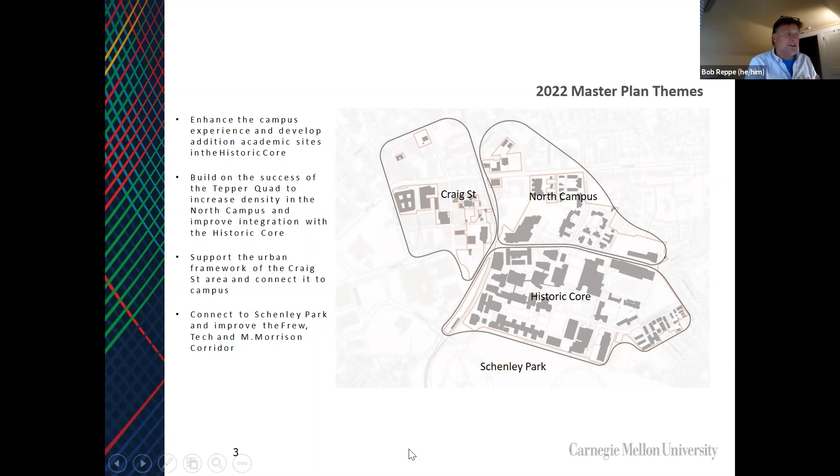We have four basic topics that we want to talk to everybody about today: our development sites that we're identifying in the master plan, and then I'll talk about mobility. Then I'm going to hand over to Jen, and she's going to talk about infrastructure and sustainability, and then community outreach. So we'll just keep moving on these.

For our development sites for this upcoming 2022 institutional master plan, we're looking at 20 potential development sites. Some of these sites have been around for quite some time, maybe 2 or 3 master plans, they just haven't yet been built. Some are new sites, some are sites we think might be built in the next few years, and some are more blue sky ideas. We want to talk about each of these as we look at them in the 3 districts we have here.

In the historic core, we have 2 sides of campus. There's the west of the cut area that we're looking at first, which includes 5 sites, including a potential new or expanded facilities operations that are kind of our roads and grounds facility. That would be down to expand the facility that's already built in the hollow.

That would then give way, hopefully, to a new academic site, which is site number 2, where our current facilities group is housed. This would be a new potential academic building located between Scott Hall and the CIC building, facing into the hollow.

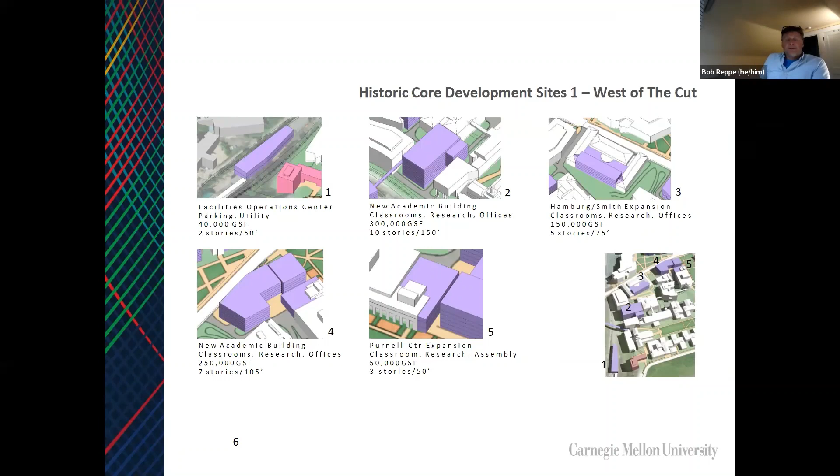If we go to the east area of the cut, next slide please. In this area we have 2 projects: number 6, a small addition onto the West Wing Residence Hall, and the Margaret Morrison Carnegie Hall expansion. Both are continuations from the last master plan, brought forward exactly as outlined in the 2012 institutional master plan.

We have a 3rd project in that area, up near Hammerschlag Hall on top of the hill, another small infill piece. This is actually a typo — it would be 6,000 square feet, not 60,000 square feet, a bit of a difference there. Basically enclosing the open space on the ground floor of Hammerschlag Hall in glass so it could become a new student commons.

The last big area shows 2 options at the bottom, 8A and 8B, which are 2 different scenarios proposed for the existing Donner Hall site. Donner, sometimes called Big Blue, the residence hall built in the 1950s, is moving past its prime potentially. So we're looking at 2 different scenarios: 8A would focus on student housing.

8B would be a scenario focused on moving student housing to other locations, which we'll talk about in a moment, making the Donner Hall site a potential spot for a new academic building. You'll see a couple of these spots where scenarios could either be more focused on student housing or more focused on academic and research.

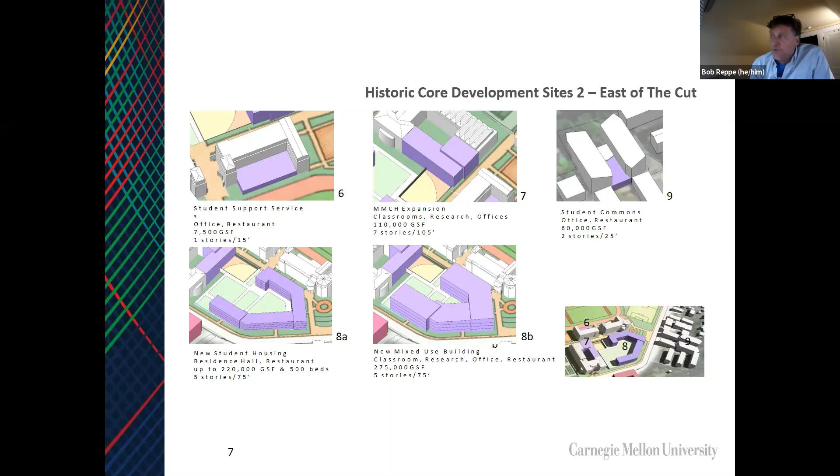As we move to the next slide, it's important to note that for each of these sections in the master plan, we're developing a series of urban design guidelines, as you can see here. These guidelines will guide the development of buildings more architecturally. As you know from experience with master plans, the plan really identifies a box within which you can build. The urban design guidelines give us additional criteria and targets regarding height and massing, setbacks, materials, entrances, etc. These are examples of that.

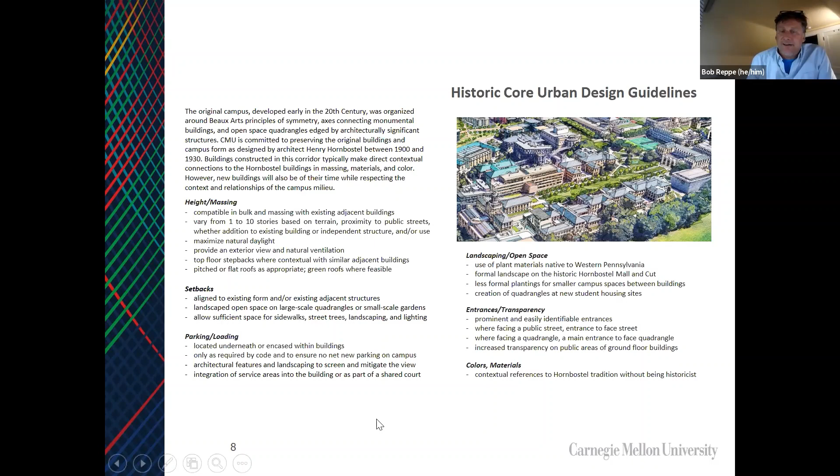Let's move to the North Campus. This is an area we're looking at allowing for additional density, maybe more density than we normally see at Carnegie Mellon, with buildings that could be as high as 8 stories in some places.

We have two sites, 10 and 12, which are continuations from the last master plan. Site 10 is an expansion site for the recently completed Tepper School of Business. Site 12 has been identified as a rethinking of the ground floor at E Tower at Forbes and Morewood, once our health center moves to the new health and wellness building in 2024.

Site 11 is the remainder of the Morewood parking lot, long known as the big surface parking lot. We're carrying forward two scenarios here: 11A, more residential focused, and 11B, more academic building focused. Working with the Donner site mentioned earlier, one of these could go residential and one could not, so we built flexibility into the master plan to allow for either scenario to develop.

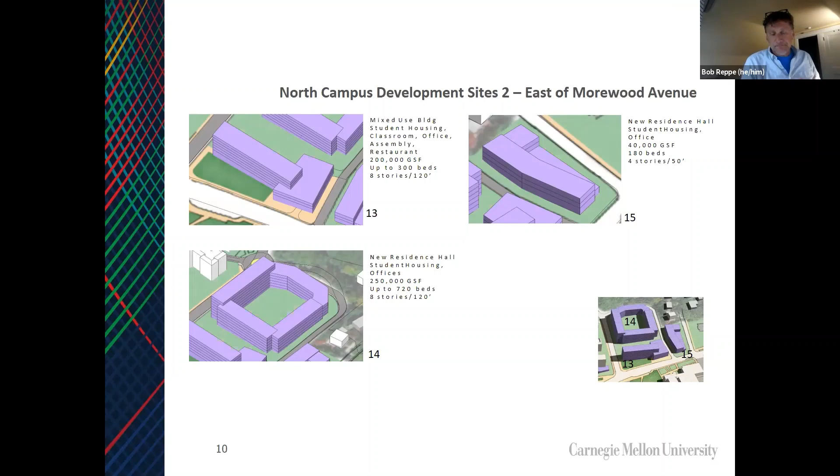If we go to the next slide, please, Kathy. Again we have the urban design guidelines for the North Campus, focusing on those same 6 main areas, though these are a bit different because this district is more in flux and more contemporary in its architecture, which is deliberately allowed.

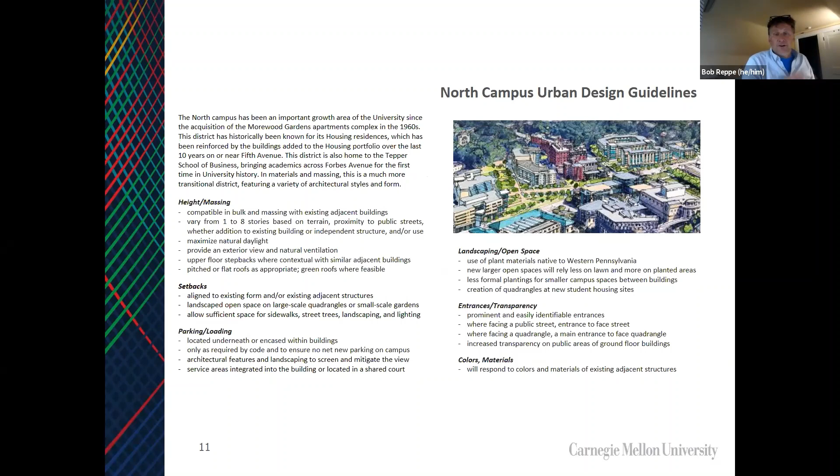If we go to the next slide, we'll shift to the South Craig Street area. Here we have the top 3 projects: the Shirley Apartments on North Dithridge Street, the existing Whitfield Hall on North Craig Street, and a small new entry pavilion project for Mellon Institute. These are seen as neighborhood-type buildings that will be much more mixed use.

The Mellon Institute project is interesting because a vast majority of people entering Mellon Institute from campus currently come in through the loading dock.

The proposal here is not something that would change the historic character of the building, because Mellon Institute is in the Oakland Civic Center Historic District, but would rather potentially look at adding a glass pavilion at that loading area that would make the entry sequence into the building a little better for people coming to campus. The bottom two projects are both the north of Forbes and south of Forbes sites.

These sites are immediately right before you get to the bridge coming from Craig Street, heading east towards campus. Site number 19 is the north of Forbes site, which we see as a sister or companion building to the recently completed TCS Hall, which is currently where the graphic arts building sits. Across the street is a site we've identified potentially for our new Science Futures building, a project that may be coming in the not too distant future, which would be a new anchor building for the university sciences.

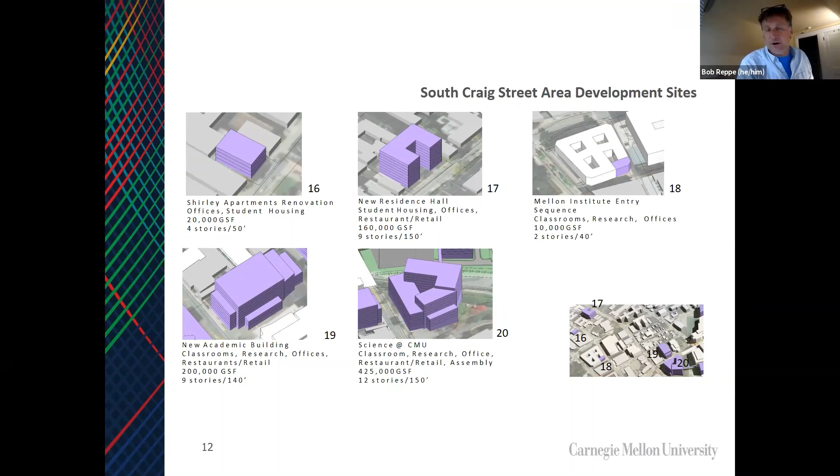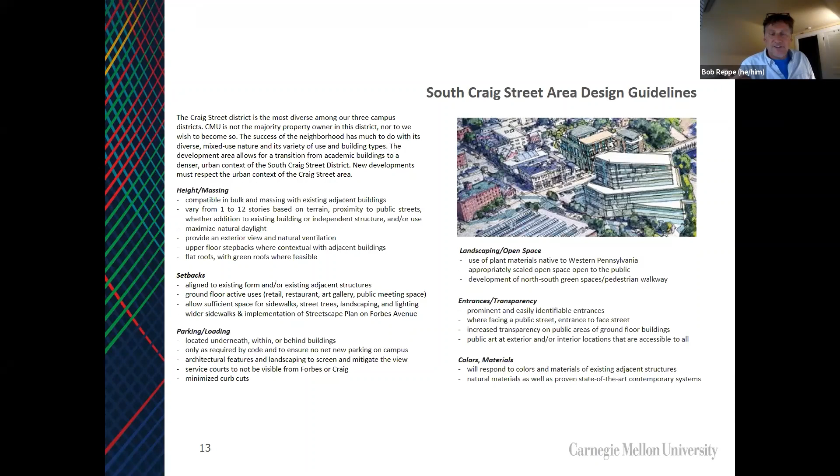So that's a real quick run-through of our discussions on development. Is it best just to go all the way through and then take questions at the end?

Yeah, and just looking at the time, given we have this many presentations on the agenda, just to give you a time check—you've been going about 13 minutes. So I don't know how much more, do you have like three times that left? No, it's more about time. We're probably about 40% of the way through. That was the kind of meat of what we needed to get through.

And we can talk—both Jen and I will kind of glance through the next sets. Okay, and again, understanding that all these slides are available for people, and if they have questions, they can reach out to us.

So let's move on to the next set of slides, which is the mobility slides. I'm going to focus on this one, and then we'll walk through the others very quickly. The mobility goals really define all of the university's ideals and plans for mobility over the duration of this master plan. The statement at the top is key—focusing on people over vehicles, flexibility over status quo. This is demonstrated with the graphic on the right showing pedestrians take priority, over bikes and other wheel-independent personal vehicles, over transit, over single occupancy vehicles at the bottom.

There's a whole host of ways we want to accomplish this, including improving pedestrian pathways and connections, adding bicycle amenities and connecting to the East End bike network, and working with our institutional partners to develop shared shuttle systems. At the end of the day, the big piece of this is working toward a plan that ultimately drives no net new parking on campus from where we are at this point in time.

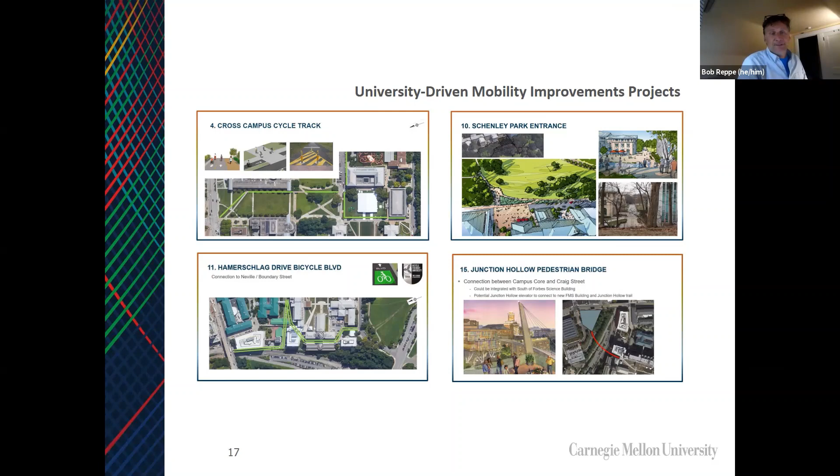Some of these are much more focused on working with our community partners, such as working with the city to correct the misaligned two sides of Morewood Avenue at Fifth Avenue, so you have a straight shot instead of that weird dog leg, and creating a bike connection from Fifth to Forbes along Morewood Avenue. Or rethinking the intersection of Tech Street where it hits Schenley Drive and adding an all-way stop so pedestrians crossing from campus into the park, and vice versa, have a safe crossing place. Also dealing with the Forbes Avenue Railroad Bridge to make the pedestrian area much better there.

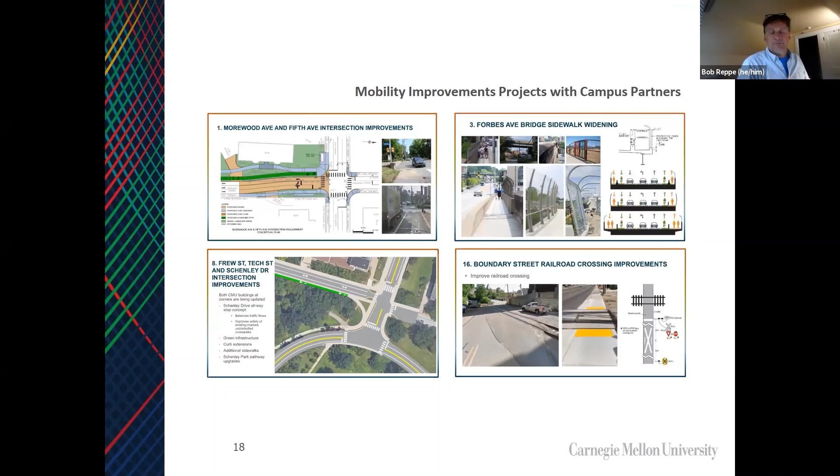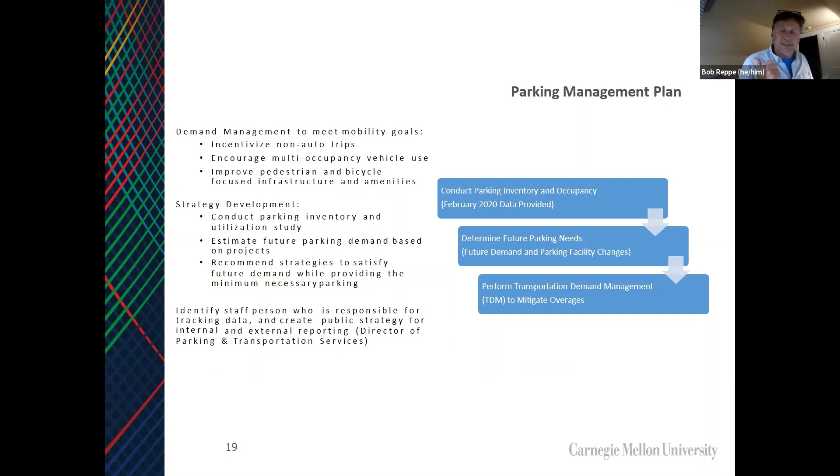If we go to the next slide, this is when we talk about no net new parking. It's a busy slide, so I won't get into it too much right now. The idea is, how do we make a statement like no net new parking when we don't know exactly what the growth patterns are for the future? Part of it is identified here as our strategy, but if we go to the next slide, we can talk about it more, and you can see from the pie charts it's really not so much about

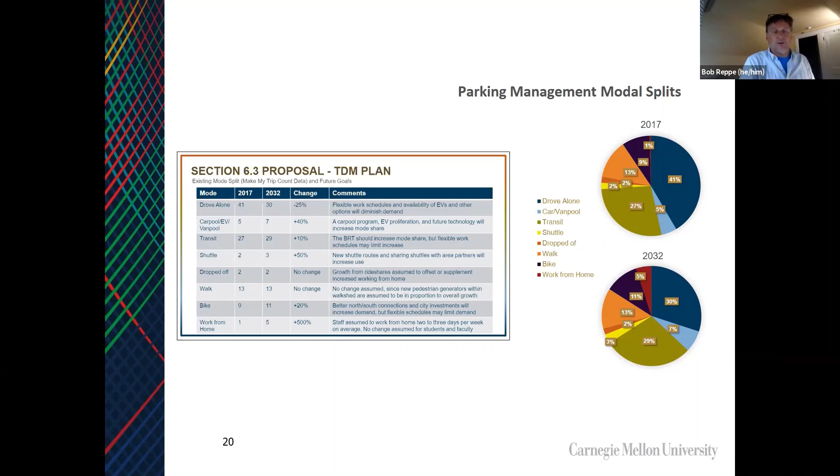Working with the Port Authority on integrating into the new bus rapid transit that's coming is another part of it. Integrating with the bike network being developed in the East End is also part of that.

We have a series of other things we're going to talk about, please feel free to read these on your own. We talk about pedestrian network improvements, moving sidewalks away from the curbs, adding planting strips, adding bump-outs at corners like on Forbes and Margaret Morrison Street to make the pedestrian zone safer.

Next slide, please. We talk about things such as integrating into the East End bike network, creating connections across campus to really knit the evolving bike network of the East End together, and integrating Carnegie Mellon into that to make it a seamless bike experience to get to and through campus.

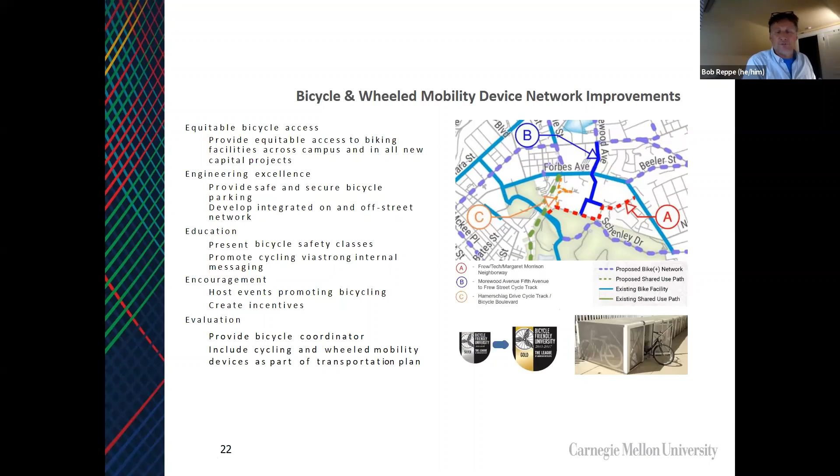The last piece is working with our companion institutions to look at opportunities where we have overlapping shuttles, to get into a shared shuttle system so we can be more efficient with the shuttles and potentially expand where shuttle service goes. And then, of course, continuing free access to the Port Authority for full-time faculty, staff, and students, and working with the Port Authority on the development of what they're calling Project G in their long-range future, which is a connection from the South Hills through Hazelwood, through Oakland, and up through the Hill, and ultimately to the Strip District, and being a part of that development.

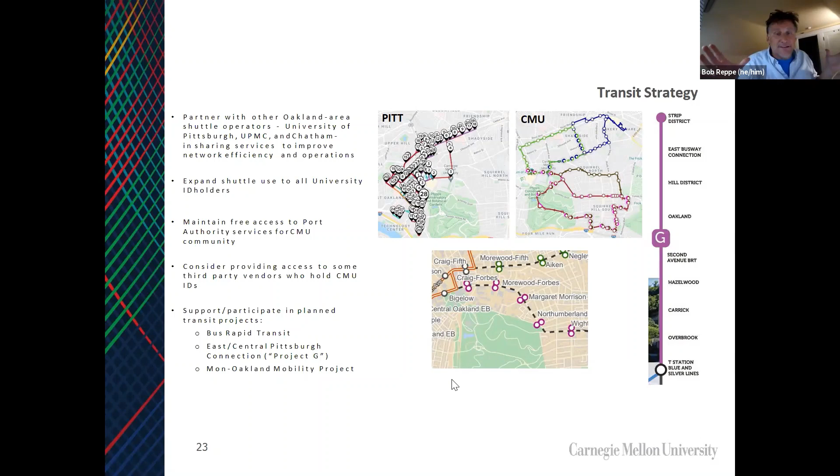That's a lot of mobility stuff that's happened all at once, and I think that was the last slide on that. If you go to the next slide, please.

I'm going to turn it over to Jen, and she's going to quickly go through our discussions on infrastructure and sustainability. Thanks, Bob. Next slide, please.

Carnegie Mellon has a long and proud tradition of sustainable practices and responsible activities towards the environment, and we're going to continue with that over the next, sort of forever, but definitely over the next 10 years as we implement this master plan. These are four overarching goals that we apply to all of our sustainability practices: fulfillment of the United Nations Sustainable Development Goals, there are 17 of them at the bottom of the page.

We're a founding member and committed member of the Pittsburgh 2030 District. We've built LEED buildings since LEED came into existence. One new thing we're going to do is create a platform to help talk about how we're doing as a campus with our sustainability practices, looking at the university as a system when it comes to energy usage, water usage, greenhouse gases, and the like. Next slide, please.

For our environmental protection goals, we think about the physical aspects of the environment, like steep slopes or floodplains. We're going to continue taking care of those, and pay closer attention to things like increasing native plantings and reducing the amount of lawn. We're also looking at a sustainable sites checklist and how to apply those criteria to our development projects, as well as the spaces between buildings that may not be part of any specific development over the next 10 years.

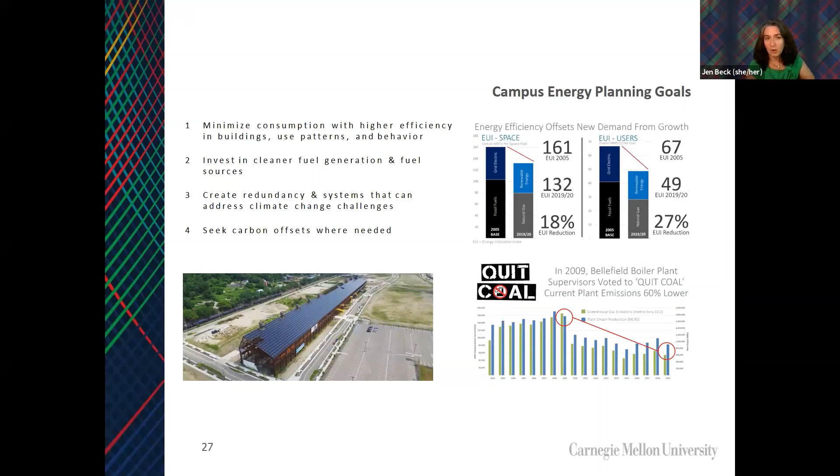Stormwater management is a big deal in Pittsburgh, and it's something we face on our campus. We're going to continue addressing stormwater, not just on properties we're developing, but also stormwater coming onto our properties from adjacent or higher spaces. We have a diverse approach: green roofs, rain gardens, stormwater retention within our buildings, and even stormwater retention outside our buildings, underground, that you can't see. We'll keep looking for unique and new ways to manage stormwater.

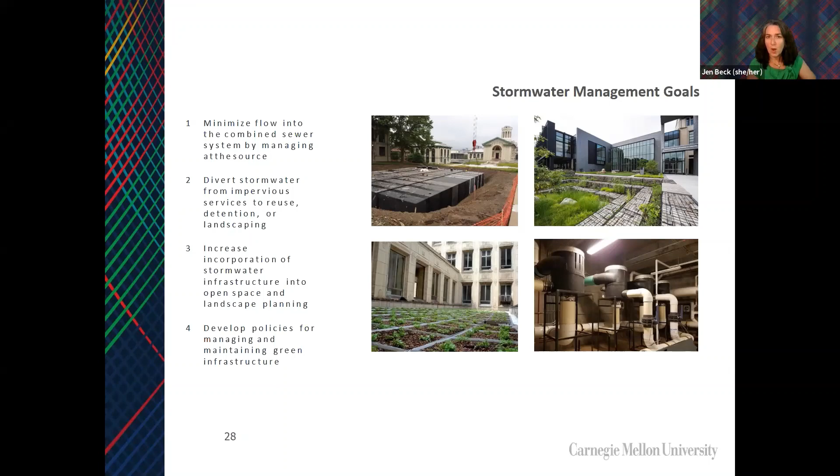As for green buildings, we have 1.5 million square feet of green buildings on campus, and we're pretty proud of that. Essentially everything built in the last 10 years has been LEED certified, which is a requirement for projects $5 million and above. We're going to look at projects that don't rise to that level, and figure out how we can get those LEED certified, as well as how to get LEED certification for our existing buildings.

Waste and water management is another component of sustainability. With waste management, we're doing great with recycling and separating our waste streams, so we can continue doing a better job with composting and having a place on campus to separate those streams. We want to make sure we have enough facilities, inside and outside our buildings, for recycling.

When it comes to water conservation, as a tier 1 research university, we use quite a bit of water in our research processes. And as our campus has grown, there's an increased need for water — more bathrooms, more residence halls. So we want to make sure we're looking at things like gray water and black water usage, and how we strive to become water neutral.

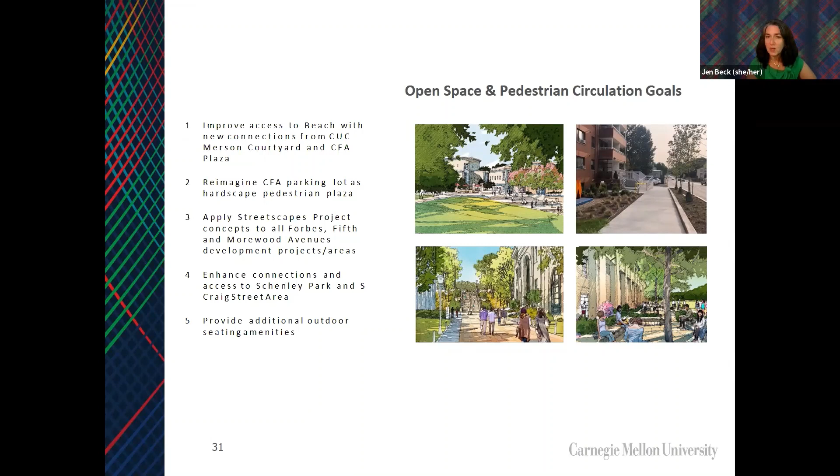Open space and pedestrian circulation is another important component of sustainability. We found out in the last year and a half that despite the persnickety Pittsburgh weather, people do like to sit outside. So how do we provide increased amenities for that, whether it's seating, bike lanes, or a better streetscape, as we've done along the Forbes and Fifth Avenue corridors? Maybe we have fewer parking lots and more pedestrian plazas. We're definitely thinking about the spaces between the buildings as maybe just as important as the buildings themselves.

Okay, so this is the last section. It's about neighborhood enhancement, and there are 5 components to our neighborhood enhancement strategy.

We want to make sure that we're minimizing our impacts on neighbors. We're thinking about the not-so-positive things about living near a college campus. We want to make sure that we're reaching out to the community, making connections, and sharing the good things that are happening on our campus with the community at large.

We want to bring enhancements to South Craig Street. Every great college has a great college street, and ours is South Craig Street. How do we support the vibrancy and diversity of Craig Street for the benefit not just of the street and the neighborhood, but also for the university?

How do we have amenities that are open and available to all? How do we bring people into the university to experience the great things that are happening? And then how do we have a positive economic impact on the region?

So, managing impacts on our neighbors. There are a couple components to this. We want to zone the properties that we own, folding those into our EMI district so they fall under the same criteria, the same regulations as the other properties on our campus.

One new thing we're looking to do in the next 10 years is improve our engagement strategy. Megan Pierce from our office will be an integral part of that, developing a newsletter to communicate to neighbors what's going on campus, not just with development projects but activities too, like when are the fireworks on 4th of July, when is Carnival, what sporting events are coming up. We think we can do a better job of communicating what's going on campus and help manage those impacts.

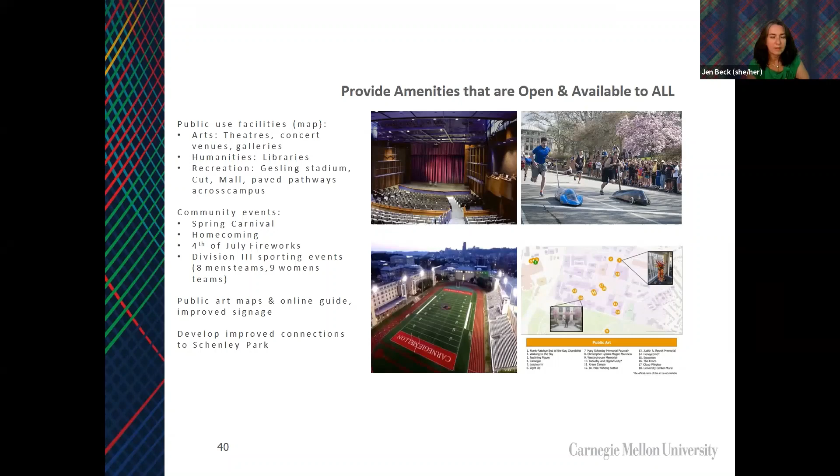And finally, having a positive economic impact on the region. As we've grown, we've created more jobs, hired employees, and we're doing all these construction projects. We have a lot of research going on, and we help sponsor startup businesses. We have an entire website about regional economic impact that you can visit to learn more about the diversity of ways in which Carnegie Mellon has a positive economic impact on the region.

Okay, so we've been having a lot of meetings since January. We're closing in on the 3-digit number, I think, as far as the number of meetings we've had on our campus with community groups, with RCOs like this one, to talk about the ideas we have for the university through 2032.

So we have some upcoming community meetings. This is the first one. You'll probably see an invitation in the next couple of days for one of our community town halls. There are three of them, so you can attend based on your schedule, although it'll be pretty much this presentation.

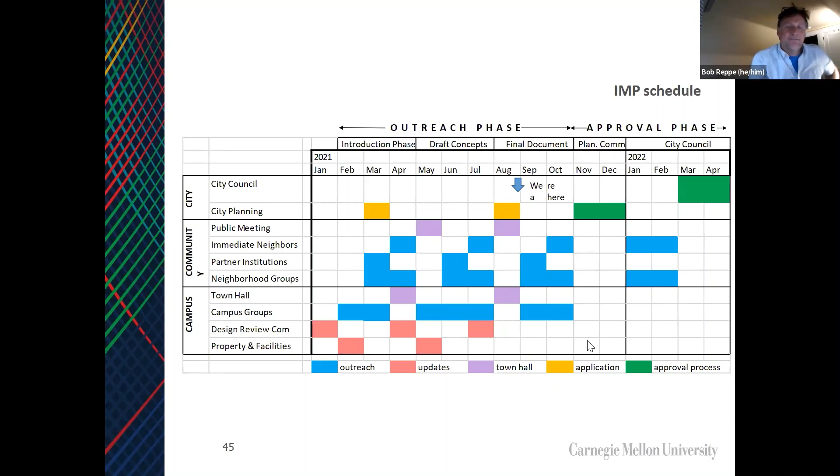I'm checking Facebook just in between our presentations. We did have a question I don't think I verbalized at the beginning about what is being done about partying off campus in Oakland, and that's certainly been an issue for us in the last week. I would encourage Oakland residents concerned about this issue to come to our Let's Talk and Oak Watch meeting coming up in September, and to call your city council representative with concerns in between time, and for immediate concerns you can call 911. And if it's a longer term issue that isn't immediate, you can use the city's 311 complaint line. I would encourage residents to use both of those as appropriate.

You can also email your information to Oak Watch at oakwatch@opdc.org, and we'll be gathering testimonials and information about exact issues we might want to make sure our university partners send somebody to address. If there's a particular address that was problematic, let us know and we'll make sure that gets reported as well. So I just wanted to respond to that, but definitely get involved with Oak Watch and follow that more closely. It is something we are working on - it's a very, very serious concern right now.

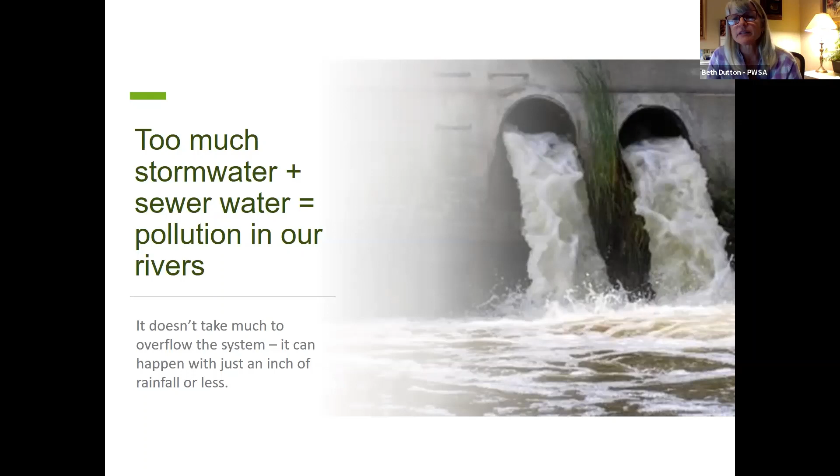Stormwater often combines with sanitary sewer water, which is what we flush from our toilets and goes down the drain, and it combines in our sewers. If the sewer system gets overwhelmed, instead of sending the sewage to the treatment plant to be treated, the system dumps it into the rivers and waterways, or it can back up into people's basements. Billions of gallons of sewage overflow each year into our rivers and waterways, and it doesn't take much to overflow the system — it can happen with just an inch of rainfall or less.

As noted earlier, our system was not built for this volume of stormwater. We have more pavement and hard surfaces than we did 100 years ago, and more rain and localized severe storms that the system needs to handle. Approximately 1/4 of PWSA's 1,200 miles of sewers still in use today were in the ground by 1908. So we're dealing with a very aged system.

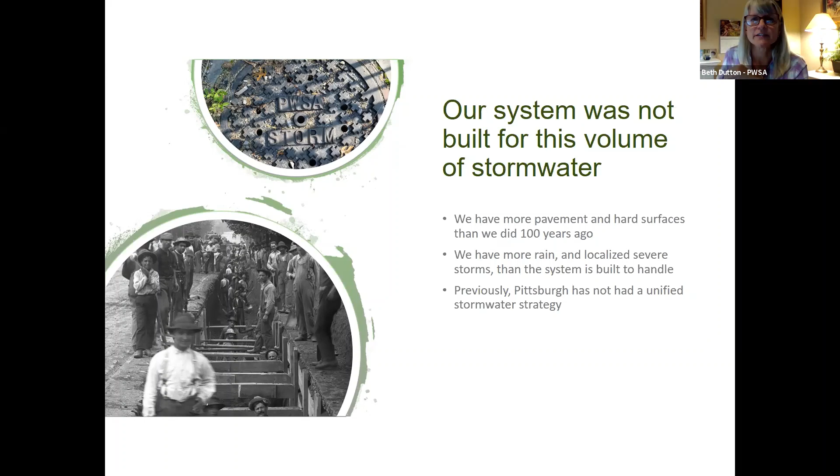To tackle our stormwater challenges, PWSA is going to build an innovative stormwater management system that keeps as much stormwater as possible out of our sewers during storms, so that when it rains, we don't have basements backing up with raw sewage.

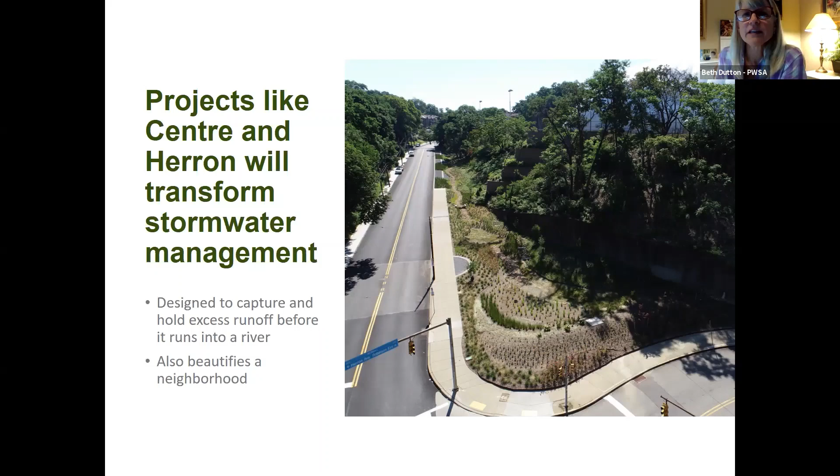So as you can see here, this is one of PWSA's green infrastructure projects. This is Centre and Herron, and this is going to transform stormwater management in the city with projects like this. This project was installed several years ago, and it manages about 1 million gallons of stormwater per year. It captures and holds back the runoff before it causes a sewer overflow into the river. In addition, it's a nice amenity for the neighborhood and helps beautify it.

As I stated, PWSA is building a system that keeps as much stormwater as possible out of our sewers when it rains. One of the ways we're doing this is by building green infrastructure such as Centre and Herron, which will absorb, slow down, and help hold back sewer overflows and the flow of water.

Green infrastructure uses solutions that mimic nature. When we combine it with traditional stormwater solutions like underground storage, catch basins, and culverts, we can use this holistic approach to address our region's stormwater problems in the most affordable and effective way possible.

To date, PWSA has constructed about 13 green infrastructure projects throughout Pittsburgh. Sawmill Run and Wightman Park were completed last year, and construction has recently started on the second phase of the Wightman Park project in Squirrel Hill. We're also starting construction on projects in Shadyside, 4 Mile Run, and North Point Breeze. In addition, several more projects are currently in design.

With the concerns about building green infrastructure, better managing stormwater, and reducing sewer overflows, we'll need an additional revenue source to help make this all happen. A stormwater fee, if approved, will help fund these projects and other stormwater initiatives. This is a smart investment that will help improve our management of stormwater and reduce flooding issues. Prevention of these kinds of problems is a more cost-effective way of dealing with them, before it becomes a crisis.

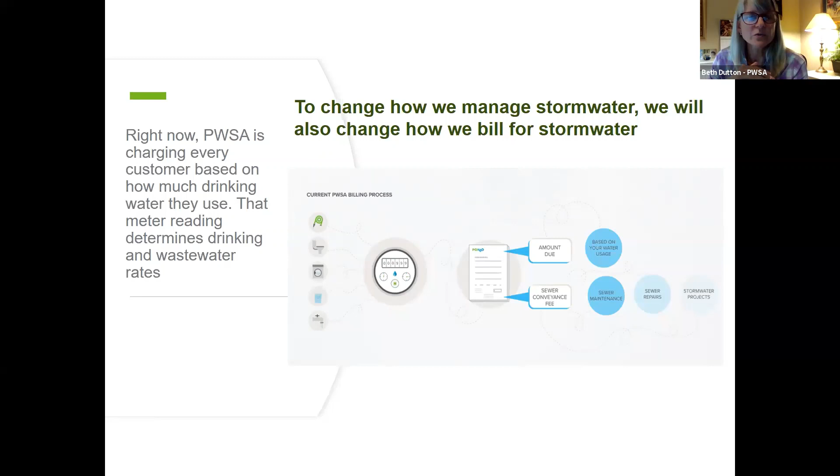To change how we manage stormwater, we're also going to change how we bill for it. Currently, PWSA charges every customer based on how much drinking water they use. That meter reading determines both the drinking water and wastewater rates. But this is not an equitable way to charge for stormwater because it considers the amount of water used rather than the amount of stormwater generated by a property.

Starting in 2022, stormwater will be billed differently, pending PUC approval. Every parcel in Pittsburgh has been mapped, and even if a parcel has no water meter, it will be eligible to pay a stormwater bill to PWSA, provided that it has greater than 400 square feet of impervious area. As noted, this will be a more fair and equitable way of billing than meter usage.

So the fee is a smart investment, and if we don't improve our stormwater management system, these flooding issues we've been experiencing will only get worse. Every property owner will pay an amount proportional to the amount of impervious surface on their property. I'll go into this in the next slide.

The stormwater fee is based on the amount of impervious surface on a property, as I noted previously. Impervious surface is the hard surface on a property, such as roofs, sidewalks, and parking areas that don't absorb stormwater. These hard surfaces generate stormwater runoff that collects trash and sends polluted water into our local waterways. This water can also overwhelm our sewer system and cause streets to flood, basements to back up, and sewage to overflow into the local rivers and streams.

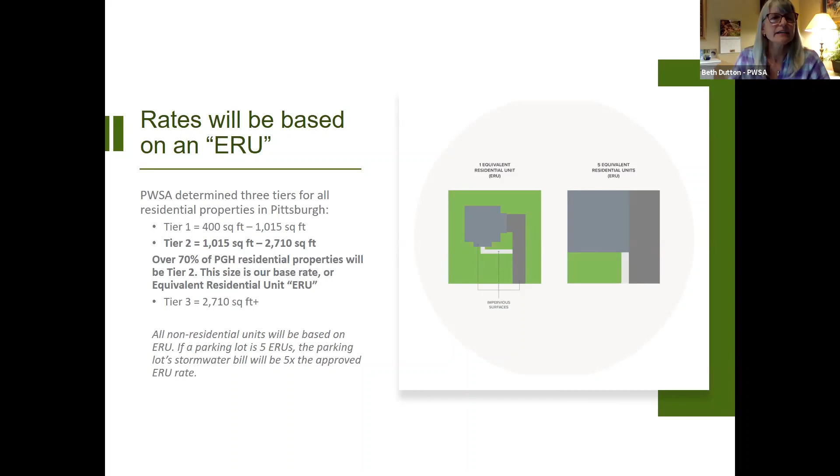So we took to heart the need for equity in the fee. And as I noted before, because the properties are different sizes, we have these 3 tiers, broken down in different monthly rates.

For our first year, 2022, when the stormwater fee will be implemented, for the 1 ERU, that's tier 2, the monthly rate will be $5.96 for residential properties. And in 2023, that rate will be $7.95.

Rates for non-residential customers, such as hospitals, the city, universities, and commercial properties will also use this ERU model to determine their rates. For this purpose, 1 ERU is equivalent to 1,650 square feet. So for example, if a parking lot is the size of 10 ERUs, the parking lot's monthly stormwater bill will be $59.60, provided that the rates we proposed are approved by the PUC.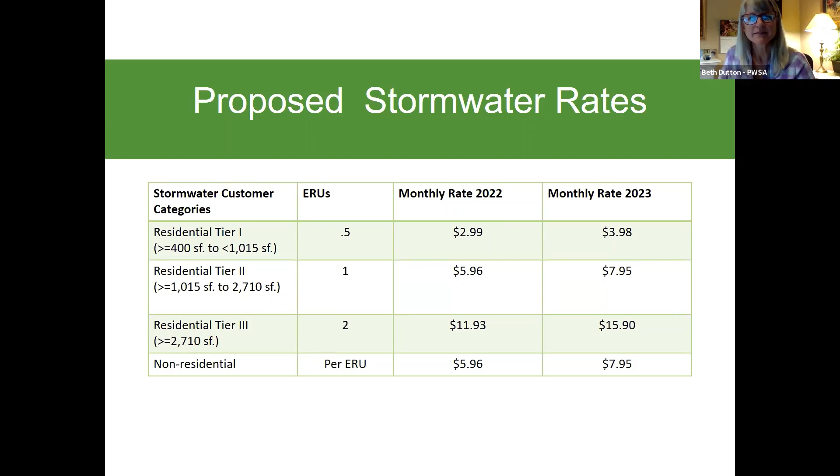Next slide please. So the payoff for better managing stormwater through additional revenues will be fewer basement backups, less pollution, and a healthier, better Pittsburgh. By changing how PWSA charges for stormwater, we can over time improve how we manage stormwater and provide multiple benefits. We didn't get into this situation overnight, so it will take time to address these in a systematic way, and I'll talk about that in a minute.

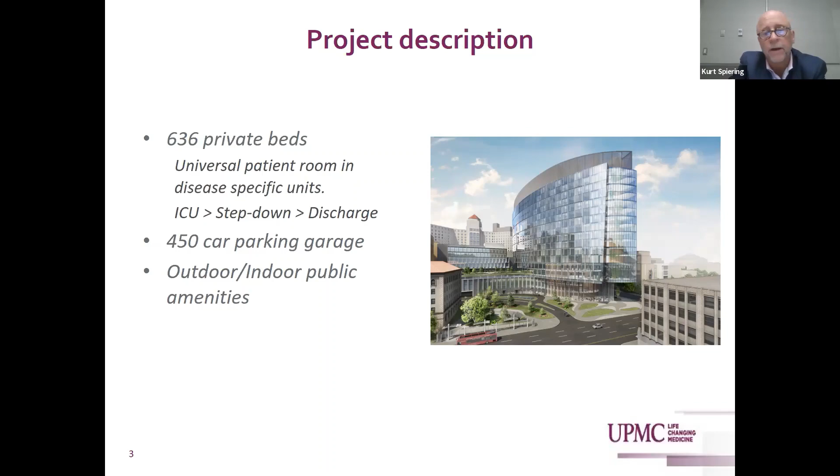It also includes a 450-car parking garage, which is part of the overall building but not self-evident from the street, used to help serve the majority of the demand for the inpatient units included in the tower. We also have outdoor parks or green spaces and amenities that Bryan will go through in a minute, to help create buffers between the community and the building itself.

From a wayfinding perspective, we have three different portals of entry. If you look up at the top on O'Hara Street, there's entrance A, which is really an entrance used by the community, accessing Terrace Street. But our primary entry portals are down 5th, which has the inpatient entrance off of Atwood Street, what we're calling the ambulatory or outpatient entry, and the emergency department entrance along Lothrop, and then an intended post-acute and outpatient entry along Darragh Street. Again, all of them access off 5th Avenue and off Forbes primarily, and those create the circulation paths across the campus.

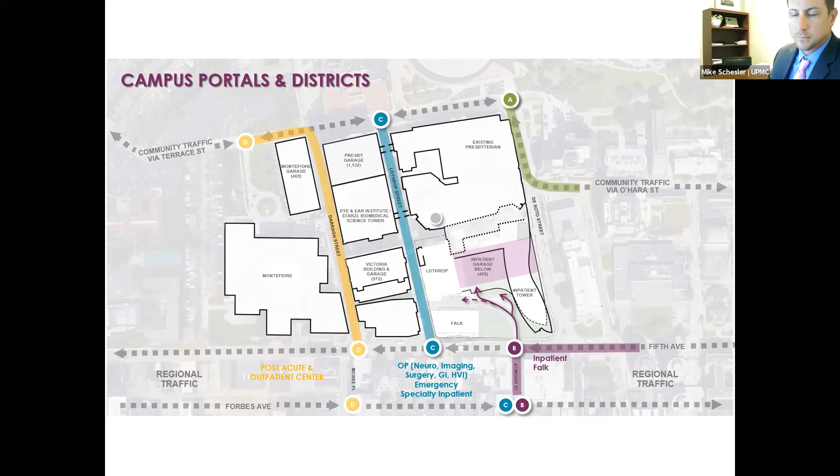Thank you. It feels like we've been in design for a long time, but really it's been master plan refinement, so only recently did we get started into the meat of design. We've just started our design meetings with internal users, and we're going through a series of community engagement meetings, which this one is. We're hoping to do those throughout the balance of the summer and fall, which would get us to zoning in March of next year.

And then as certain design packages continue to progress, we'd have earlier ones that would allow us to begin construction as early as next summer. We're anticipating four years of construction, and then in order to activate the building, that would take us to about

the fall of '26. Similar to the gentleman from CMU, we would like to come back for an official development activities meeting in October. Hopefully this can serve as a good introduction to the project, and then we can be more thorough in a future meeting and respond to any questions we aren't able to answer today.

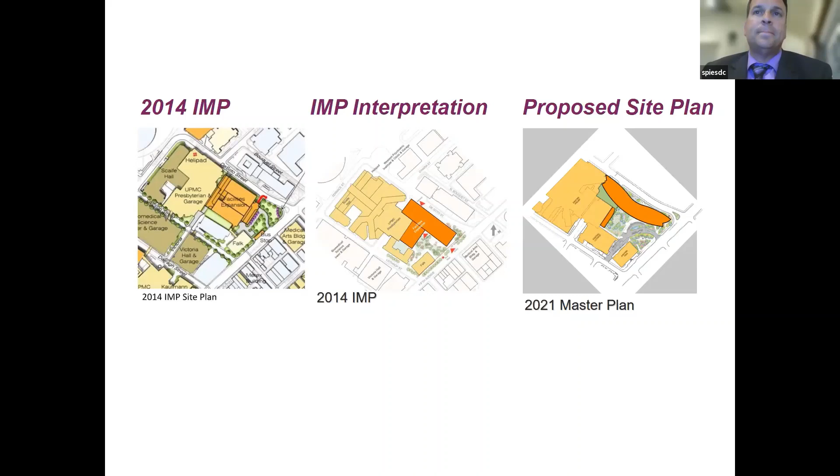And that also allows us to open up opportunities for green space and more of a public realm, as Bryan mentioned. Next.

Hello, I'm Bryan Cannon. We'll try to go quickly. I'm going to set the stage for the context. This new tower is taking its place in a really interesting collection of dramatic and iconic towers in the immediate vicinity. The following slide, next.

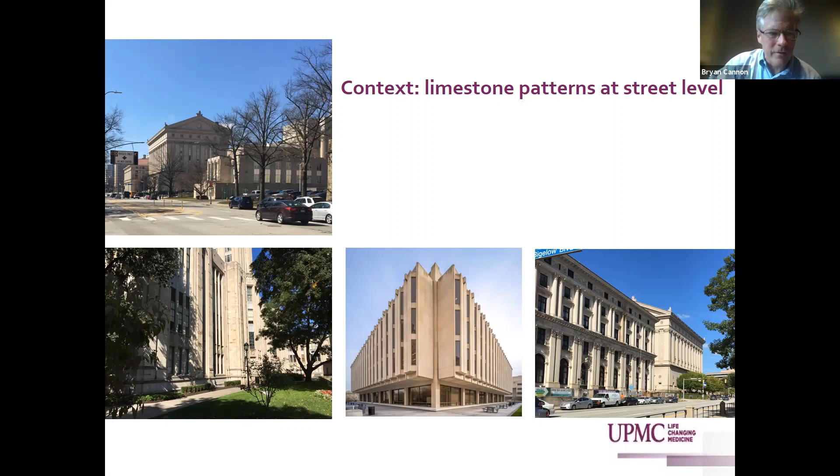In addition, there's a really beautiful pattern of limestone architecture at the street level, a lot of vertical emphasis, really beautiful detailing, and we're picking up on that quite literally in the design of this building so that it feels like it's contributing to the primary character of Fifth Avenue.

The next slide looks at one of the key attributes that we've tried quite hard to take advantage of, which is a sense of quite serious urban buildings set in a really beautiful park-like landscape.

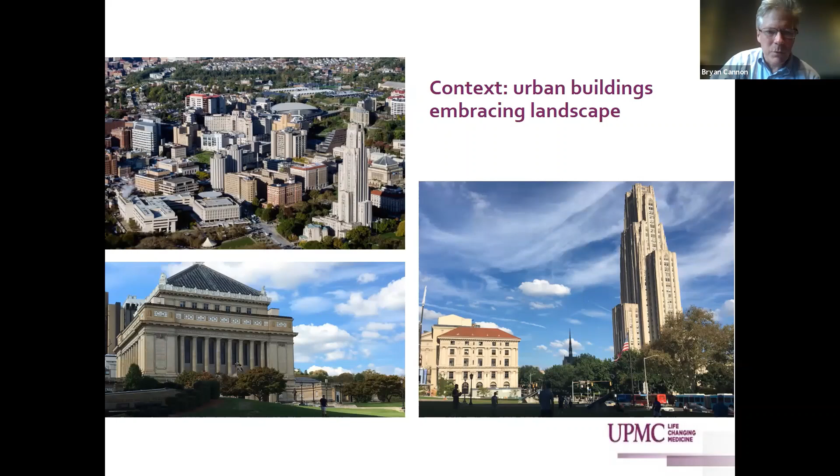The next slide tells a bit of a story of how we've been able to excavate some of the old history of the site. The image on the far left shows a concept for the Presbyterian Hospital with its original great embracing arms, defining the end of a large entry forecourt. The middle images show some of the feeling of how earlier in the century, Old Presby sat on the hill in a kind of park-like hilly landscape. And the image on the right shows what we're attempting to accomplish by carving out the center of the site,

creating tiered gardens, one right down at Fifth Avenue and one up above the raised parking level, which reintroduces a significant amount of green space and also creates wonderful amenities both for the community and for the patient population living and working in the hospital.

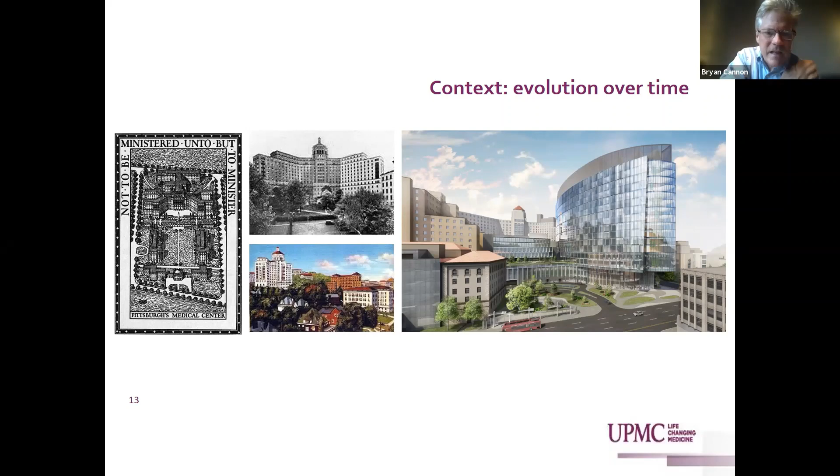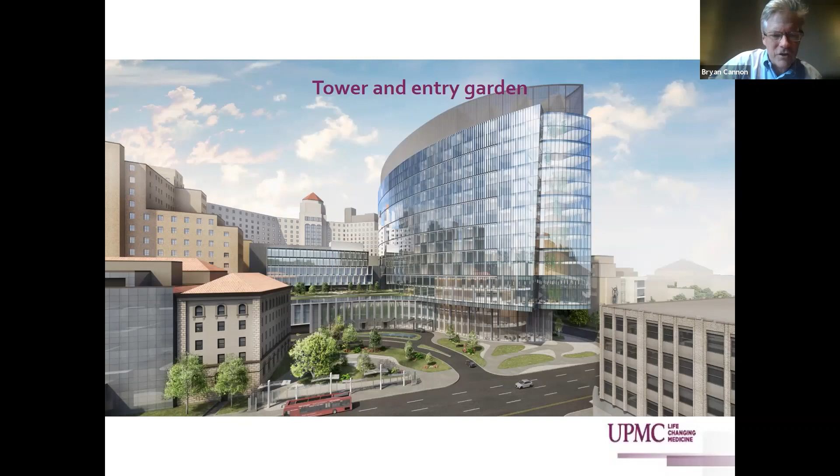Next slide looks from the opposite direction. We've seen a version of this. Here we're looking north back to the old Presby Tower and our entry garden at the ground level and elevated garden above the garage. The next slide gives you a sense, under 300 feet tall, just about 590 feet north to south.

The base of the building, 39 feet tall, aligns with the existing entrance to Presbyterian Hospital up the hill. So conceptually, this project is one kind of base experience that is more immediately related to the public realm and accessible to the city. Above that sits the more private world of the patient care bed tower and its associated amenities.

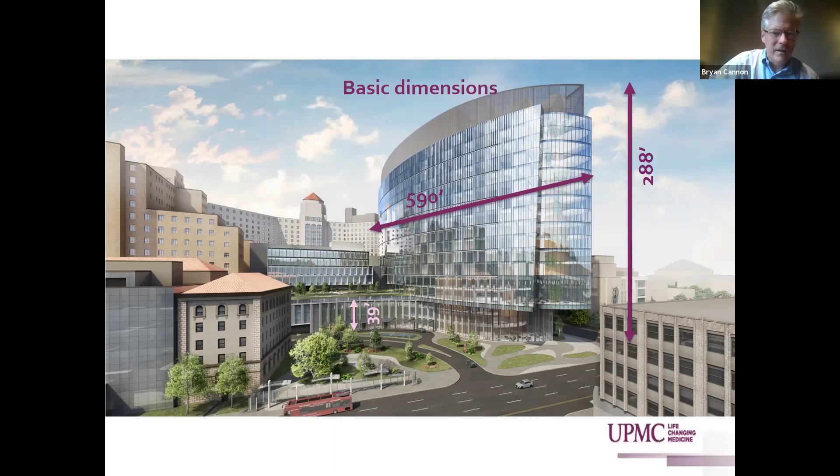The next slide looks at the view on Fifth Avenue looking east. The bulk of the building is inserted longwise into the depth of the UPMC property, so it's a big building. But we believe it's nicely surrounded by serious context buildings, so the scale is not actually overwhelming. It's comfortably bracketed by surrounding buildings as well.

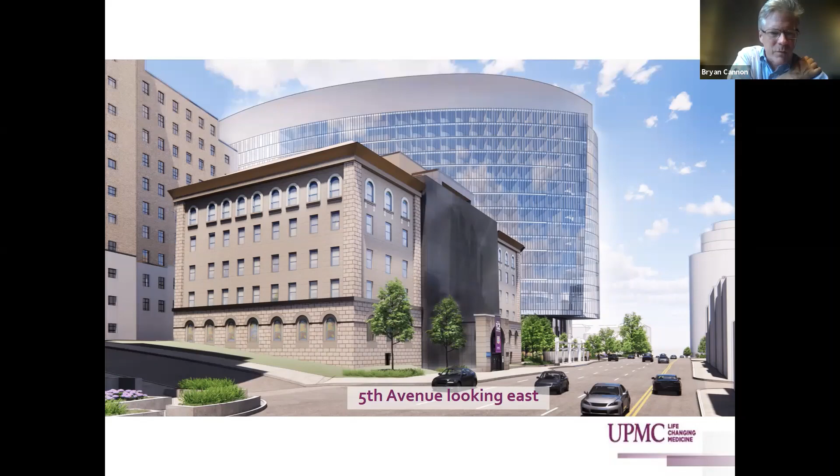The next slide looks at our entry garden. We have a cantilever right at the corner of Fifth Avenue and DeSoto Street. This opens up the corner of the property so that views around the corner and into the park space we've been describing are considerably more generous and not constrained.

If you look at the next slide, looking north and west right at that DeSoto intersection, you can see how the cantilever significantly opens up the public space. So as you're traveling on Fifth Avenue, the garden space that is part of the project is open and accessible to the public, and we've created a more generous public plaza space right at the corner of what is a very active and busy urban pedestrian scene.

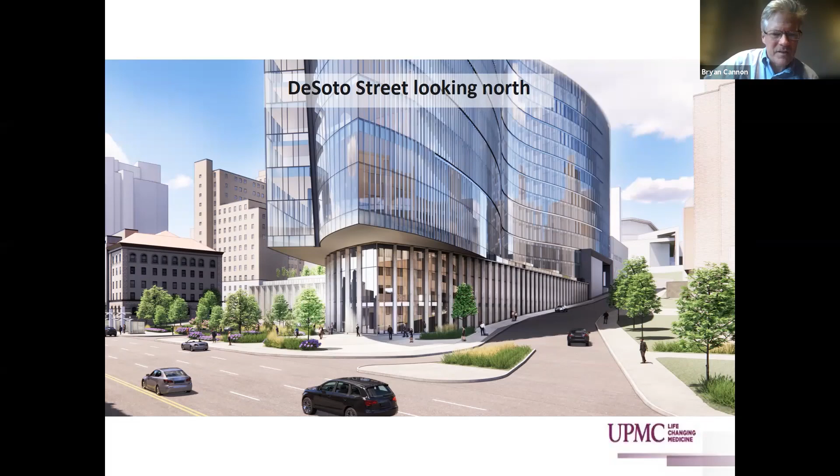Keep going, one more. This is a look at the building in the evening hours, which helps give you a sense of how the interior of the base 3 floors of the building relates to the street.

These are the spaces that we describe as the lifestyle village. They're support functions, dining, places where families and staff can get a little direct connection to the city, respite from the demanding experiences of caring for their patients on the upper floors, but also giving the community a strong connection to the facility inside, including what we hope are a significant number of retail and commercial opportunities that will be directly relevant to life in Oakland.

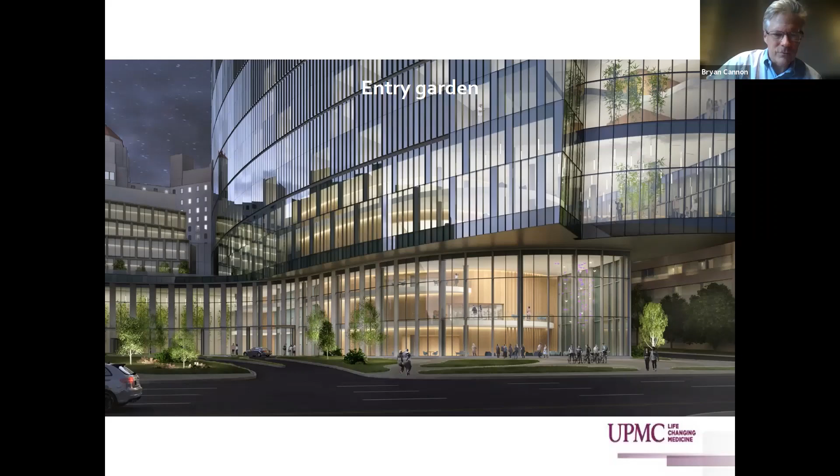The next slide looks at how the gently sinuous base that curves around the front of the building accomplishes a 3-story connective lobby, which disguises the 3 stories of parking above grade. So from the street, you have no sense of a significant parking structure on this property, and we'll be putting landscape and manageable ornamental trees of modest scale up on the top of that.

This section doesn't show it, but there are also 3 levels of parking below grade, which support the valet parking operations. Next slide looks at halfway up the hill, if you head up DeSoto Street to the existing primary entrance of Presbyterian Hospital, which we now call the north entrance. It serves the outpatient population coming to Presby and to a lesser degree to our new tower.

It lightens the traffic burden at the main entrance down on Fifth Avenue and gives a really direct connection for patients heading to outpatient procedures. As you can see, it has a nice open aperture onto the raised garden above the parking structure, so as you travel through this space, you get a really beautiful glimpse of the landscape beyond it.

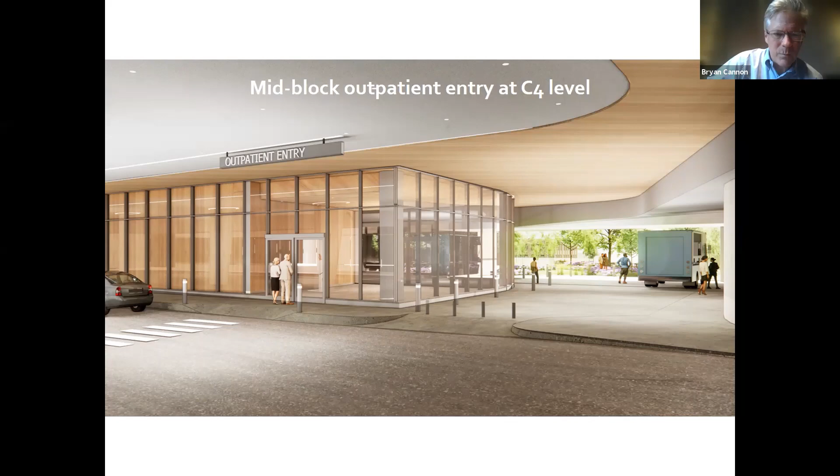The next slide looks at how that space, this elevated garden above the parking structure, might be developed with the possibility of both use by the hospital population, but also controlled public access for special events, which will make it a pretty great neighborhood amenity in Oakland. Immediately adjacent to this level is the major Presbyterian Hospital cafeteria, which affords people a really wonderful opportunity to get lunch and go out into this garden space during breaks.

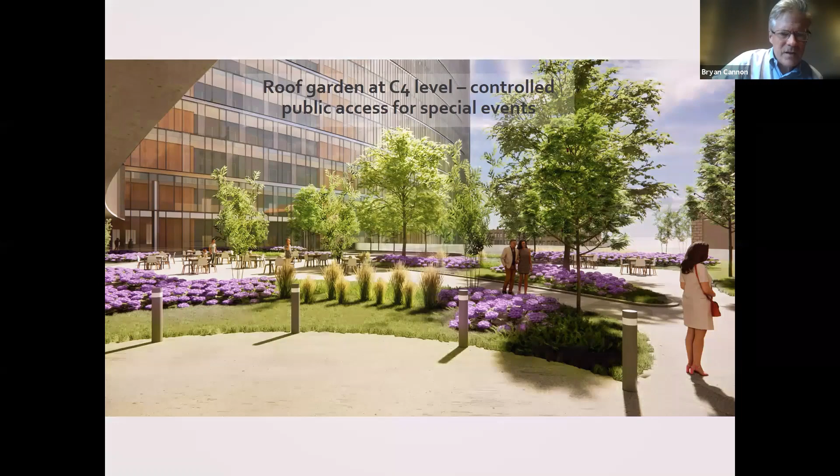Let's keep going, and I think we'll describe the flows in greater detail. Just briefly, I mentioned those flows and the different inpatient, outpatient, and the third entry, which is post-acute and outpatient entry as well.

There are points of entrance for parking. The Victoria building garage becomes accessible parking in addition to the underground parking for the outpatient entrance and outpatient services, for easy access. The Montefiore garage will be used for Montefiore Hospital as it is now, and primarily staff will be parking in the Presby garage, because the public entries will matriculate down to the south and use the underground parking associated with the building and Victoria garages themselves.

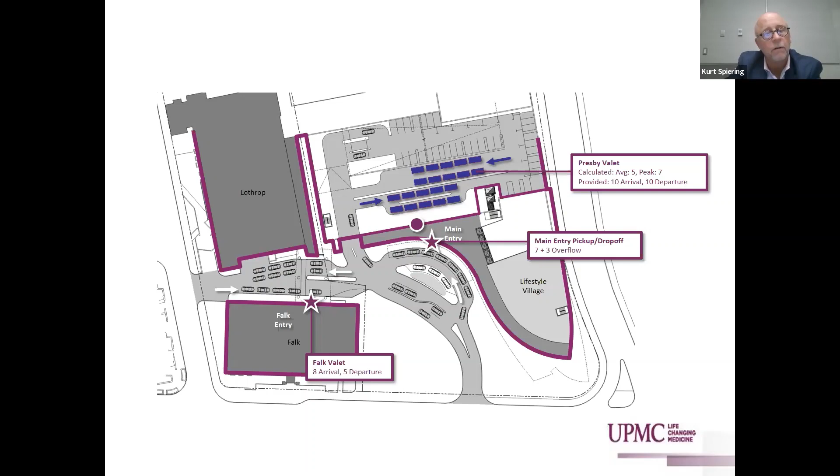Parking for Falk is as it is now, off the same entrance, and parking under the canopy and driving through to a valet drop-off and pickup sequence as it currently exists.

Next slide. Bryan, you want to describe some of the landscape? Sure—this illustrative landscape plan looks at all levels of the landscape in the same view.

Down at the corner of Fifth and DeSoto, we have a more urban public plaza, which might be useful for public events, small concerts, possibly a farmers market space. Behind the existing bus rapid transit shelter, there's an entry garden which will have additional waiting space. It's a buffer zone that creates a great experience on Fifth Avenue and also protects Fifth Avenue from the sense of traffic arrival into the hospital.

We'll have a water feature that separates the passing travel zones from the drop-off, and vehicles will enter the parking structure underneath this elevated terrace at the upper level, which relates both to the food service inside and to the north outpatient entry we described earlier.

This diagram doesn't quite show it, but the aperture that allows service and occasional public access into that space is in the northwest corner of that garden space.

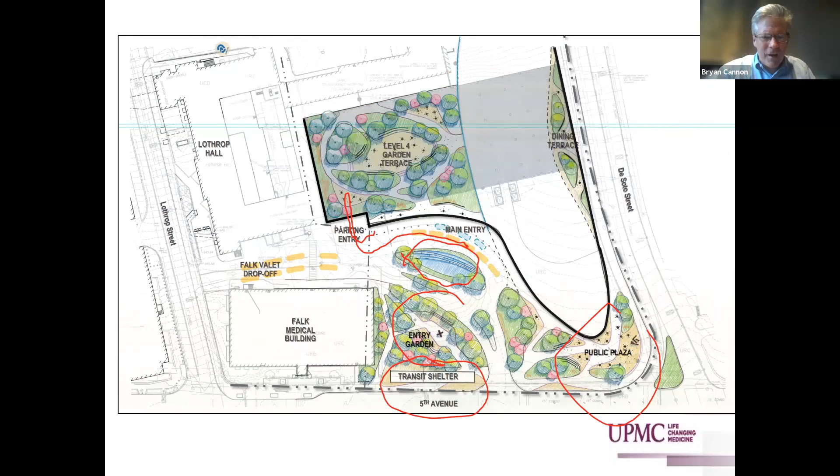So this is going to manage all of the on-site stormwater management requirements of the site quite beautifully. It does a wonderful job of creating useful recreation and respite spaces for the users and the community, and it also offers us enough acreage that we can provide some really wonderful public amenities as they evolve.

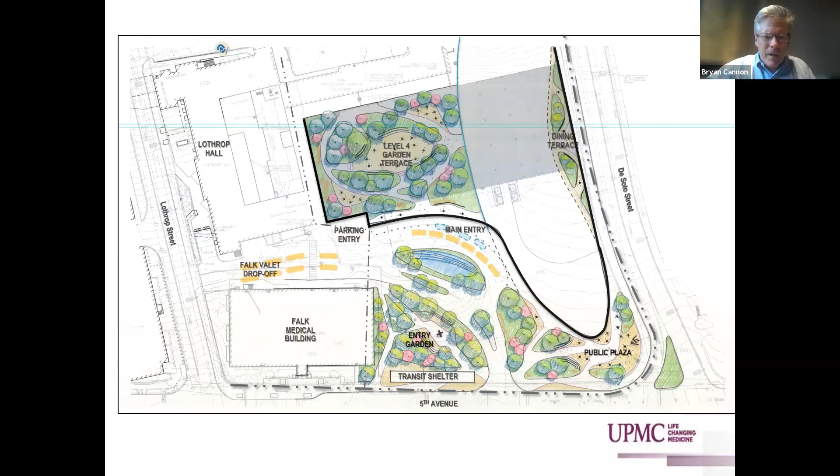We'll go now—Bryan, there's a question in chat we can answer as we go through some of the renderings again. The question was: describe how an all-glass building relates to the surrounding community context and some of the stone. I think you described it briefly, but as we go through it again, please make sure you touch on that as part of the architectural response.

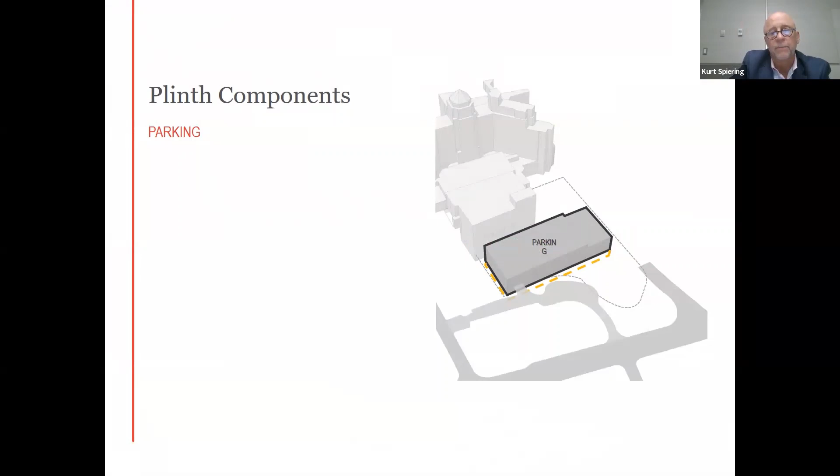When we look at the functional components, we talked about the parking deck, the 450 cars that is both below grade and somewhat above grade, underneath the landscape terrace, with the clip-on frontispiece for the lobby and waiting. Next slide.

This shows the lobby in front and the lifestyle village that Bryan mentioned with the public amenities. The idea is that this bottom space is really supposed to welcome the community. We don't want to create a fortress on this site that wouldn't be welcoming for the public, but at the same time, as we move up in the building, we need to create that sense of privacy you might want for your own healthcare experience.

But we want to make this lower level area immediately accessible and welcoming to the community, because that's where they'll be accessing it on the greatest level, which is at the street level where all the activity is.

The next slide is the sky lobby. Because most of Presbyterian is up this large hill, we're actually up about 4 stories from the 5th Avenue site to the actual roadway that passes through one block away, under the ED and current main entrance. We're using that as the sky lobby.

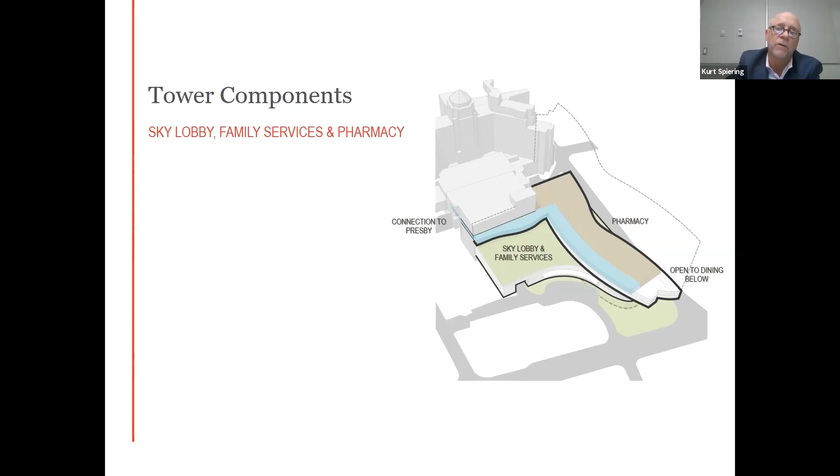So one level above the ED and old main entrance is that sky lobby, which connects both buildings in a very public way. That also walks past and views over the terraces and the green space we have down below on grade. And then the inpatient floors above will be repetitive inpatient floors designed for specialty units but have a commonality.

And I would just make one comment. Even though the building appears to be very sinuous and in some ways very design oriented, it's a very rational floor plan. It has space where we need it for supplies and storage within the units, and it removes that space from the center of the building, where we have public access and elevator cores and don't need as much support space. So I want to make it very clear that this is a very rational, very logical floor plan that evolves into something that is quite elegant and quite simple.

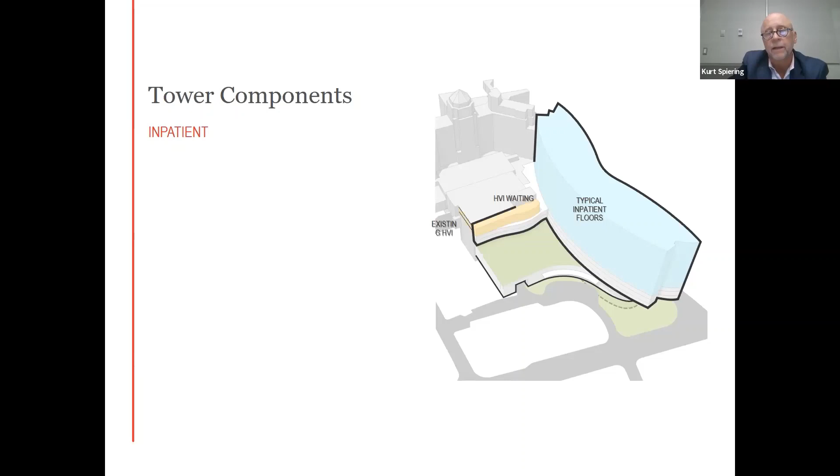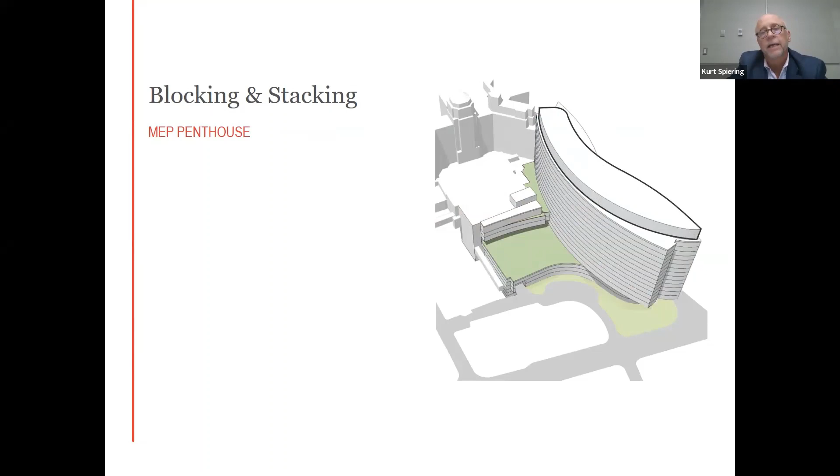And then the penthouse above is integrated — it's actually a screen that screens the mechanical units that are open above. For the most part it's a portion of closed and open space. The penthouse is also designed to facilitate helicopter travel, which is not changing, since it's on the old Presby roof, so it allows that helicopter to access the building in its current flight path.

Bryan, maybe before John goes to community, you wanted to speak to the glassy top and the stone bottom and why that combination makes sense for us as architects, and why the community would want to understand how we came to that conclusion. Sure, if that's okay, Wanda, can we fire away? Yeah, sure.

One of the primary programmatic drivers of the skin selection, of course, is how the building serves the patient population inside. There's significant research showing that patient recovery is improved by access to views and natural light, so we're trying to optimize that experience.

With respect to the exterior, a building of this size in glass can take on a lot of the character of the neighborhood by picking up the colors and light patterns that change throughout the day. It's a little bit chameleon-like, in that colors and reflections from surrounding buildings will actually show up quite significantly throughout the day as the glass changes over time.

It's a decision that, for a building of this bulk, we believe takes on the lightest visual weight in glass. A heavy masonry building will in fact appear bulkier and heavier simply because it's matte and opaque. The quality of light is a little less sparkly, and overall it appears heavy.

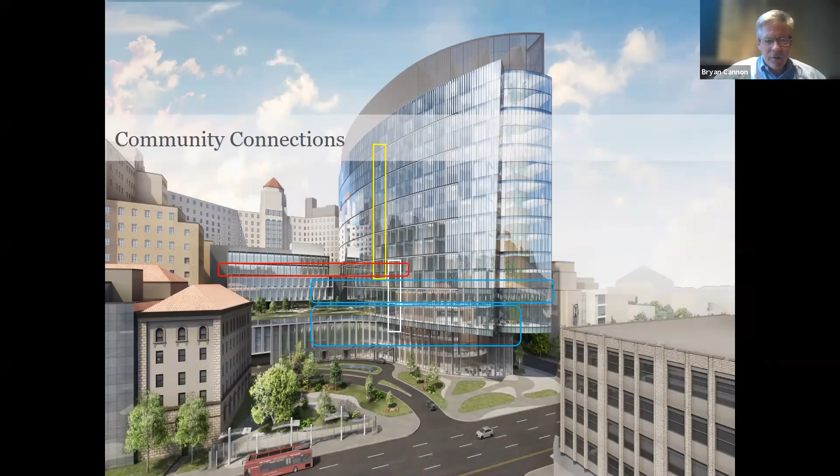The next slide is the ground level view of what we call the lifestyle village, the public-facing spaces at the tip of the building with dining and coffee that's equally accessible from the street or the building above.

Moving up one level, we expect a degree of more privacy: retail, gift shop, and art exhibit space overlooking this at the second floor level, overlooking the street, which should be a really wonderful community contribution.

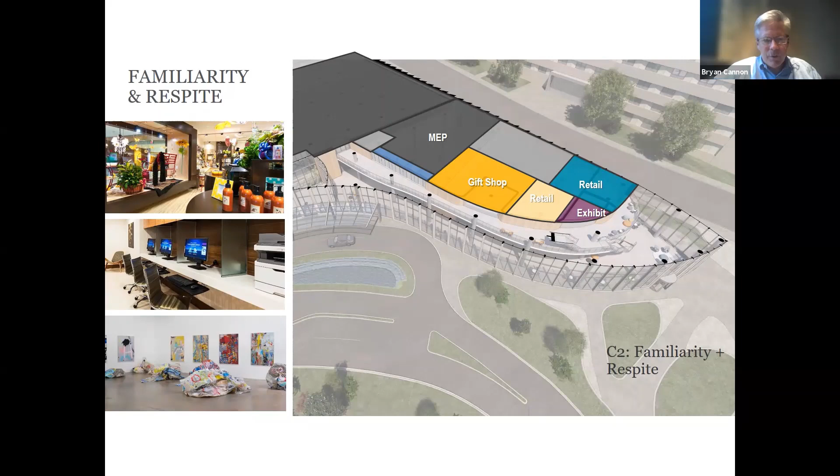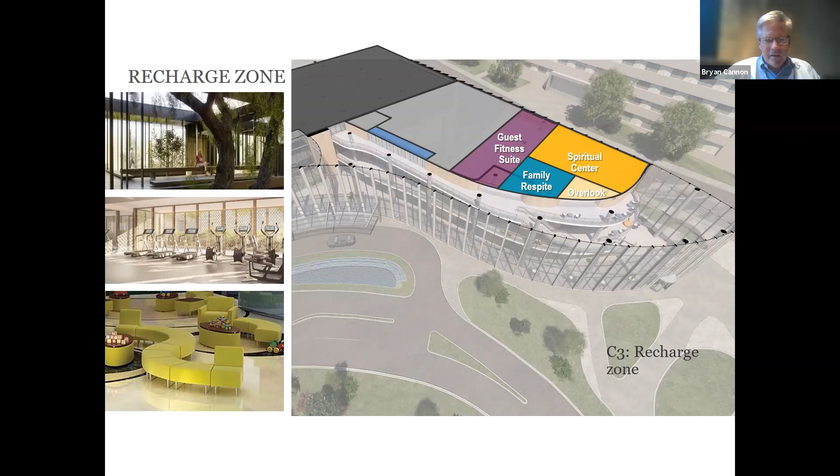And the top level, you see somewhat more private hospital-based spaces, still connected by overlook to the street: a fitness center, spiritual center, and a place for families to get away in a dedicated respite zone.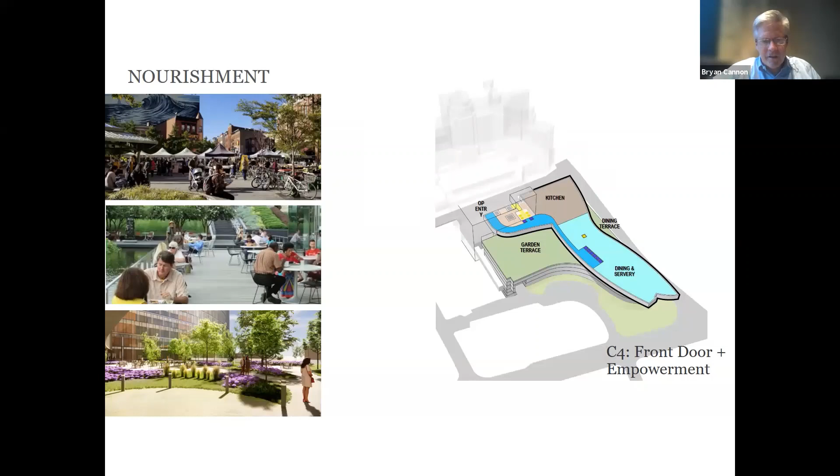And this is one floor above that, the large hospital cafeteria overlooking the garden terrace. And I believe that's the full summary of spaces.

Thanks, Bryan. So I'll go through and try to elaborate a little bit on what we're expecting during construction. As I mentioned earlier in the schedule, we have a 4-year construction duration estimated at this time.

Green paths showing along Forbes and Fifth Avenue indicate how we intend to get construction vehicles to the site. Yellow lines represent how we intend to get them away from the site. The black strips represent streets we consider off limits, and the red line represents a path of access to the construction site that we are working very hard to limit, if not eliminate. But we do need to access that northern half of the site, so that's still a work in progress.

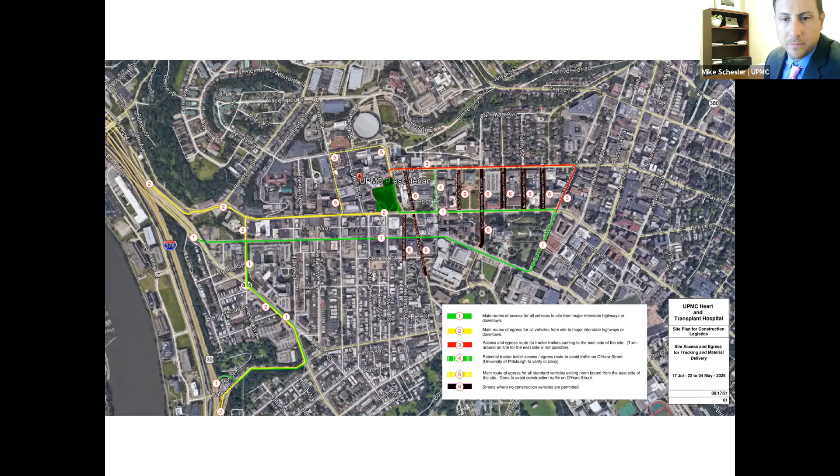Next slide. Just looking at the building site without the building on it, it is a very tight site. It's difficult to work on.

It will require long-term lane closures along DeSoto Avenue, shown top to bottom on the right side of the image. We would look to have a multi-lane closure reserving a single lane of traffic northbound, maintaining access to our emergency department from Fifth Avenue.

We would have a single lane closure along Fifth Avenue, east-west, to get construction vehicles safely into the site.

We've already worked with Port Authority and DOMI. We're still in discussion with them about these issues, but we have every intention to keep the bus stop at Atwood open and operational during construction.

But in order to safely get to that bus stop or move pedestrian traffic east and west down Fifth Avenue, there would be a required pedestrian detour shown in yellow that would take you, where the DeSoto intersection is, south across to the southern half of Fifth Avenue, and then down two blocks to the next intersection where you could again cross back over as needed.

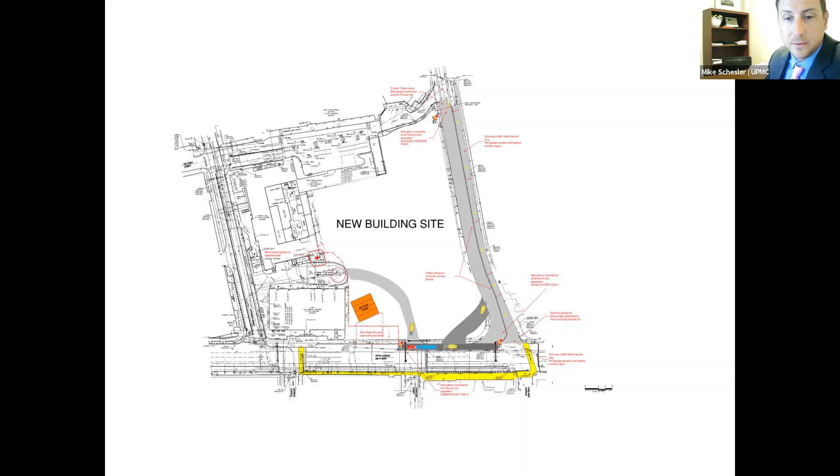Next slide, please. If you have interest, the next few slides are similar and have a QR code in the top left corner. If you take your phone, open your camera, and focus on that, it should prompt you to open something more interactive.

You can change the view for these different images that I have screenshots of below, and get a more real-time perspective of what these lane closures and protective barriers might look like.

At the bottom left, we're looking east down Fifth Avenue at the construction exit, just in front of the bus stop. On the bottom right image, we're looking west down Fifth Avenue, the same direction of travel for the one-way, where the buses will be pulling in just after our barrier.

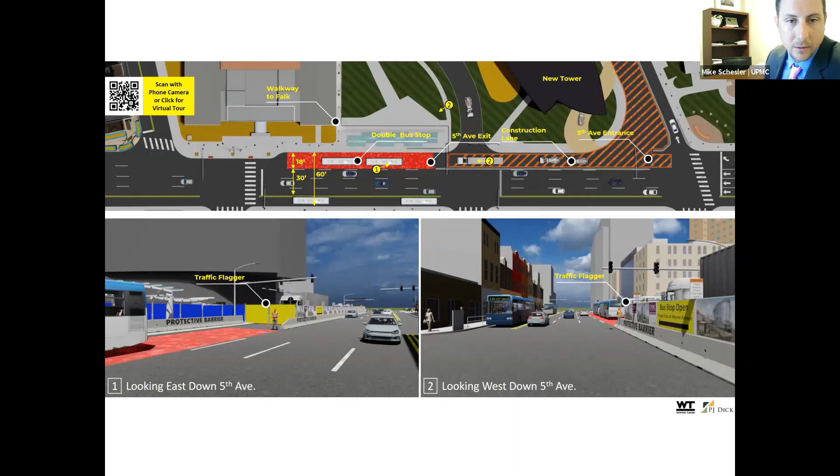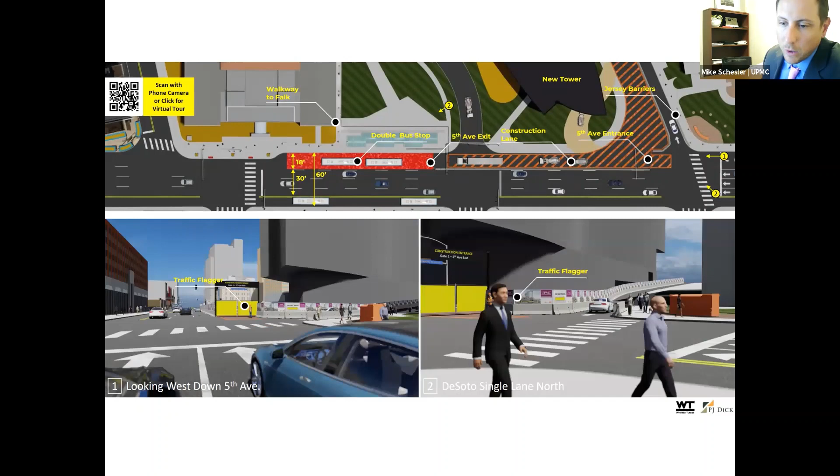Next slide. Further down Fifth Avenue, now looking west at where the construction entrance would be, is the bottom left image, with DeSoto on your right. Looking up DeSoto on the bottom right image, we would maintain that single lane of traffic northbound.

Next slide. Focused on the Falk building and the entry sequence there and the valet operation that happens - I know a lot of people from Pittsburgh and Oakland specifically frequent the site. It's very busy. We are maintaining access to that from Lothrop Street for the duration of construction.

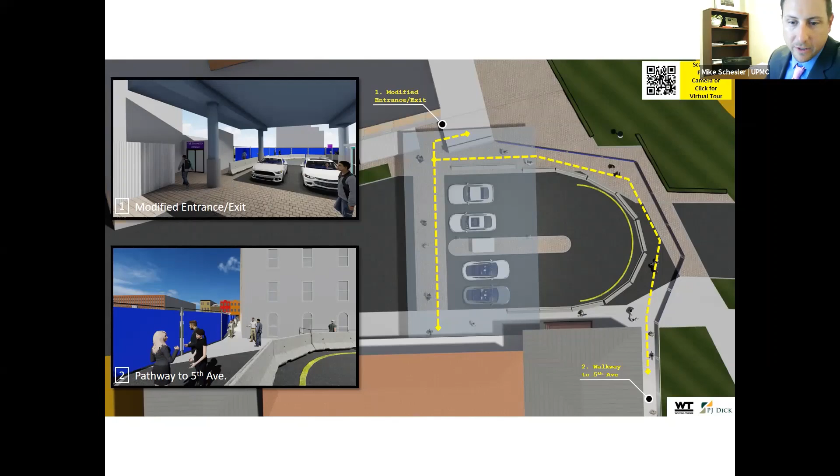We're also planning a way for pedestrian access from the bus stop along Fifth Avenue to get back to the building without having to walk around the block.

A different perspective, looking back south at that same valet operation, and you can see the pedestrians walking alongside the building, making their way back to both the connection to Presbyterian and the connection to Falk.

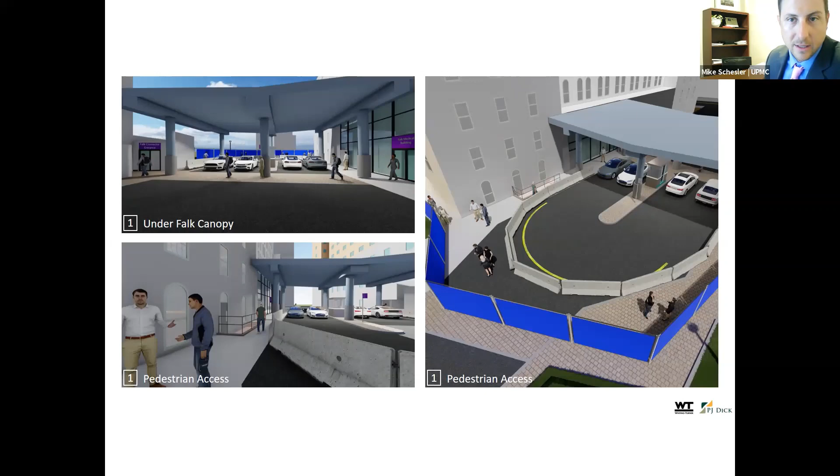To talk briefly about what Bryan or Kurt had mentioned earlier, the building has been designed in a way to maintain the existing helicopter path in its permanent configuration.

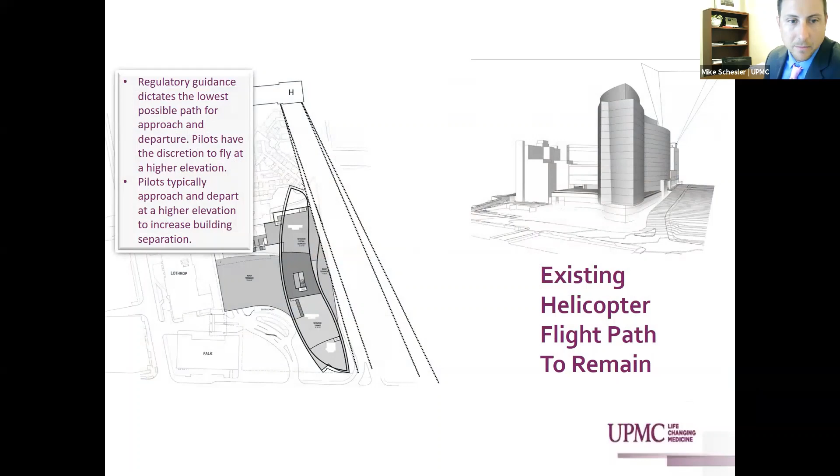Just a more artistic representation of that same concept. Next slide.

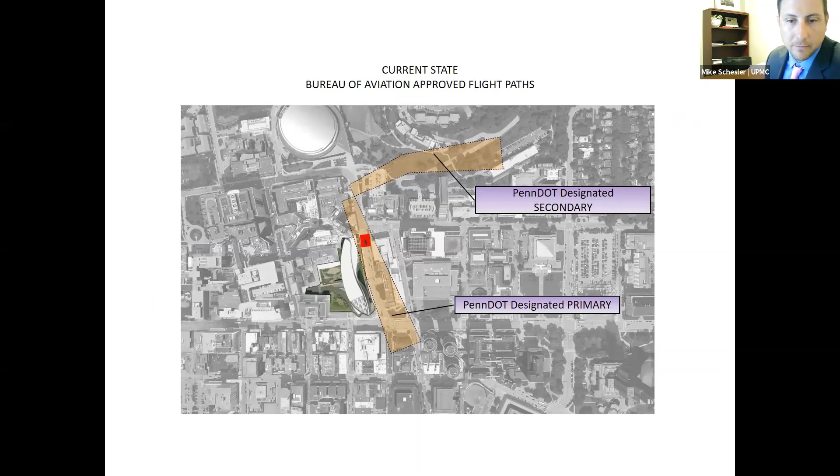We currently have 2 PennDOT designated flight paths approved for the helistop at the site. There is a 3rd path that we use, designated by our stat medevac team at their discretion, to alleviate some concerns of the neighboring communities, specifically regarding the secondary PennDOT path.

So how those flight paths are used today operationally: the path shown in green is what's used most frequently. The path shown in yellow is our designated alternate, and the path shown in red is rarely used, only on very rare occasions when necessary to maintain safe operation.

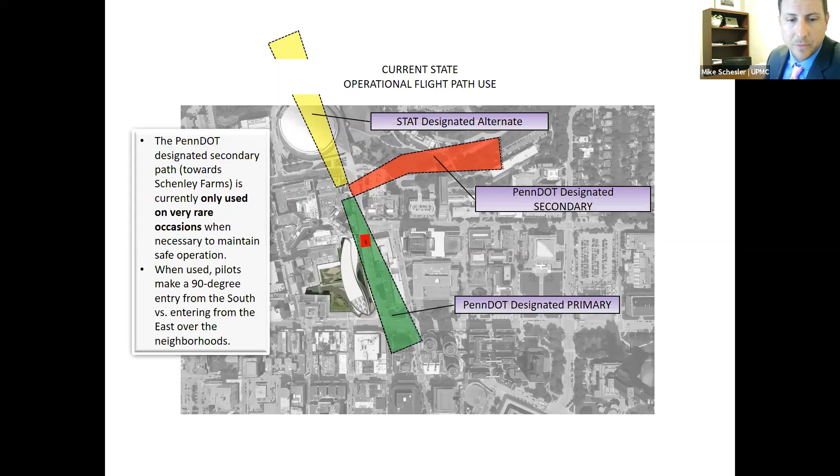So during construction, for approximately 18 months, there will be a necessary interruption to the path shown in green, to allow use of our tower cranes to help construct the building.

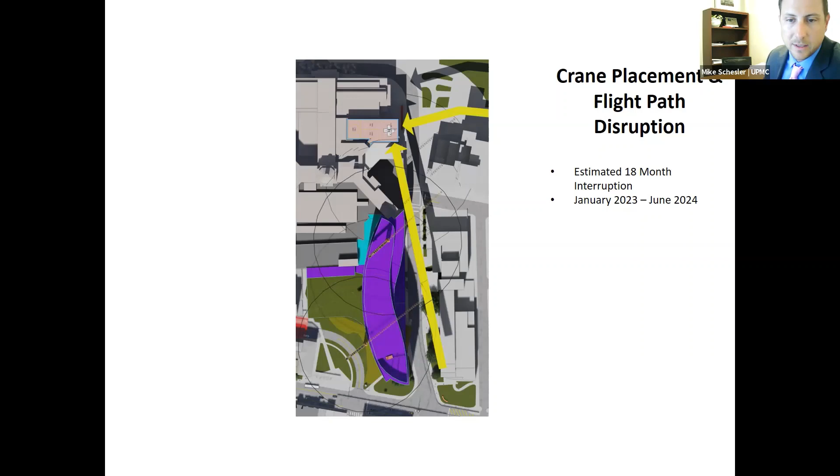During that time, the path that was green would then be red, so it's unavailable. The path that was our alternate is now our primary, and the path that was our secondary, the PennDOT designated secondary, would be our functional alternate. We do not anticipate that use of the secondary flight path towards Schenley Farms would noticeably increase. We've talked with our flight crews, and they believe they can still accommodate the same volume of flights through use of the path shown in green only.

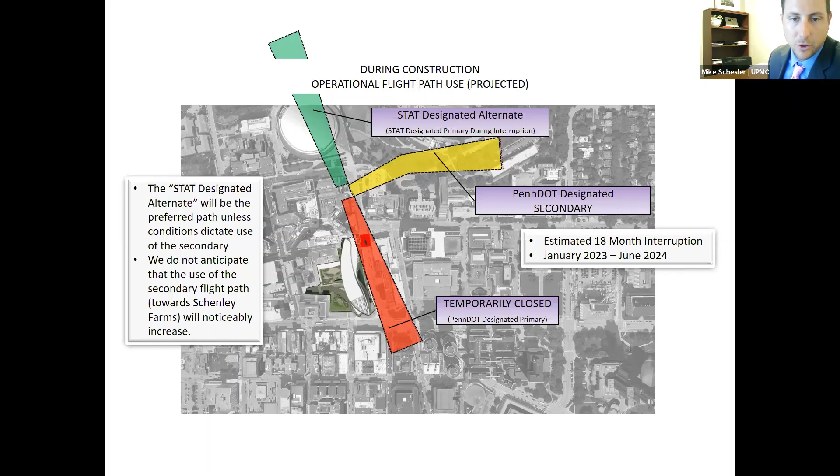Next slide. And that is it. So we can open it up for questions.

Great. While everybody else gets their questions typed in, I had a couple for you. Are you planning to go to CDAP, the city's design advisory panel? Are you scheduled to go there? And if so, could we get a report at the next meeting of information or input that they provided? We are planning. We are not scheduled, and we certainly can provide the report.

Okay, and I wonder if we could see a ground level rendering on DeSoto Street itself, of what DeSoto Street is going to look and feel like from a pedestrian level on the sidewalk, as part of your presentation. I know that's something we have. Yeah, but that one's from Fifth Avenue. We have others further up the street that we can show later. Right, so not from Fifth Avenue, but on DeSoto Street itself. I think that would be helpful.

And I was wondering if you could also include views from further away, showing what the view landscape is going to be like from multiple places. If you were further away than just at the site itself, what are you going to see? How you can see the Cathedral of Learning from all different places in Oakland. If you could show some of those images in your presentation, I think that would be helpful for the community to see.